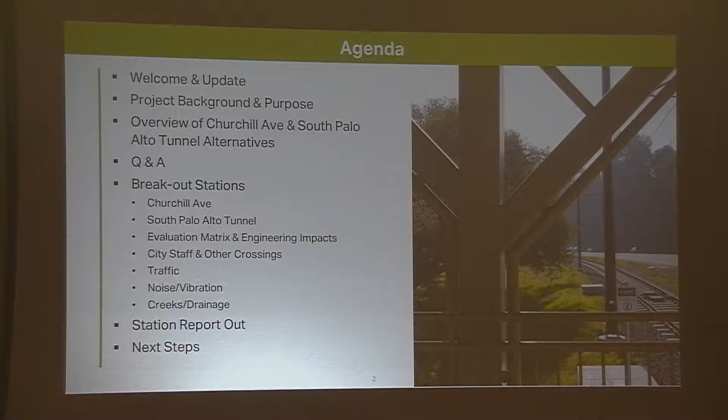So the reason for that is because not only do we have a lot of new information, we brought back all the old information. And we want to make sure that anybody who is coming here new, or had only seen one or maybe not all of the meetings, had an opportunity to meet with and talk to the engineers on all of the various alternatives.

Not only the ones that we've talked about, but we actually have a station talking about the ones that are no longer in play. And so if you have an interest in something that is no longer being considered, we actually have a station for that as well.

We have a station for traffic and noise and people who work on hydraulics. And you're going to see some matrices in this PowerPoint. We've got a station to talk about that.

And we brought all of our previous videos from the other community meetings, as well as the ones that you'll see tonight, are also down front, so that we'll only have time to play them once during the PowerPoint, but each one of them is available here too. So they'll be on constant loop, so you can get a chance to look at those during our workshop station open house portion of the meeting.

Then at about 8:20, I'll reconvene everyone who chooses to stay. You do not need to stay if you've had your questions answered and felt like you saw enough and you want to go home and watch the Raiders.

But for those who do stay, what we'll do is we'll reconvene everyone, and then I'll have the station leads at each of the stations give a report out of the kinds of topics and issues and concerns and questions that they answered, so everybody has a chance to see how their input related to maybe some of your neighbors or others that talk to that station.

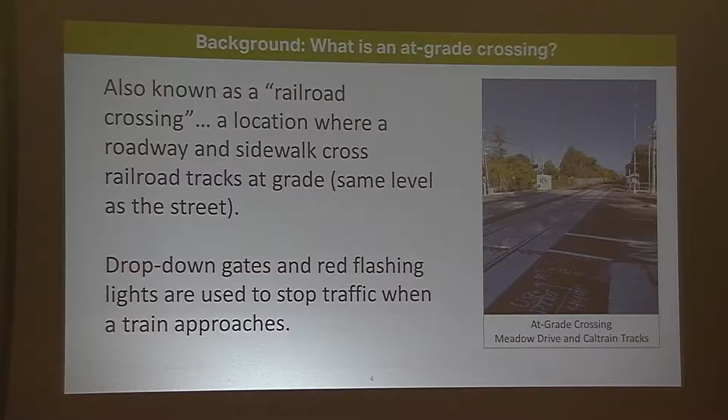But we don't have one for grade separation, do we? Okay, so grade separation is the alternative, where you've actually constructed either the rail above the street or the street above the rail in a way that allows both to pass without the use of gates. So that's just, again, for the purpose of vocabulary.

Just to give a bit of backdrop here, we have been at this for a while, and for some of you, I know, for years, several years. Most recently, with the selection and involvement of the CAP, the Community Advisory Panel, and now the expanded Community Advisory Panel, really over the course of the last year and a half, we've been in earnest looking very closely at Churchill, Meadow, Charleston, and what some of the options are there.

Our time frame, based on the most recent discussion at the City Council, is to be back to the City Council for a decision in the time frame of April and May. The XCAP itself has the assignment and the request from the Council to develop a recommendation within that time frame. Our goal is to get community feedback between now and then, and I'll describe that in a little more detail with the timeline.

This meeting tonight is the beginning of this next phase of what we're calling a bit of a roadshow, where we'll be presenting some of the same information, but really, as Eileen pointed out, for the first time trying to include all of the information on each one of the crossings. To date it's really been very specific about a tunnel, about a trench, about what have been called hybrids, but now we're putting them all together so folks have all of the information, to the extent that we could, in a very digestible form, so that we can talk about all of the options at once.

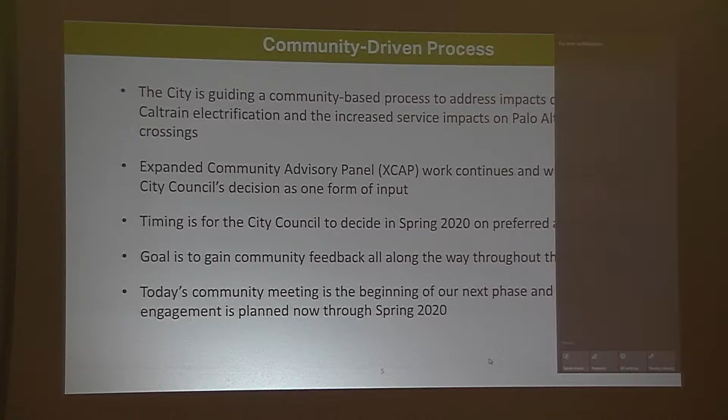Okay, so just in terms of the phase that we're at, I think we've been starting to talk about the work that's come to date as understanding the options. We started with 40 some odd options, and now we're down to, I think it's been described as 7. That effort has really been over this past year and plus, and has involved the engineering analysis, discussions among neighbors, getting some input, and really working on the terminology to try to ensure that the information put together is understandable, using consistent terms so folks can understand what those options are.

We're now really entering into what we're starting to call this community conversations phase, where we want to roll up the information that's been developed for each one of the options and start to get more comprehensive feedback from community members on each one of those options. That will ultimately lead to a decision, whether it's a recommendation that comes from the XCAP, or ultimately a decision by the City Council on what a preferred alternative approach is for each one of the crossings.

Now, in fact, I have mentioned the City Council several times in the last couple of minutes, and I neglected to point them out. I'm going to limit my acknowledgement to the current council, because if I pointed out the former council members here, they'd be half the room. So current council includes Alison Cormack, who's here.

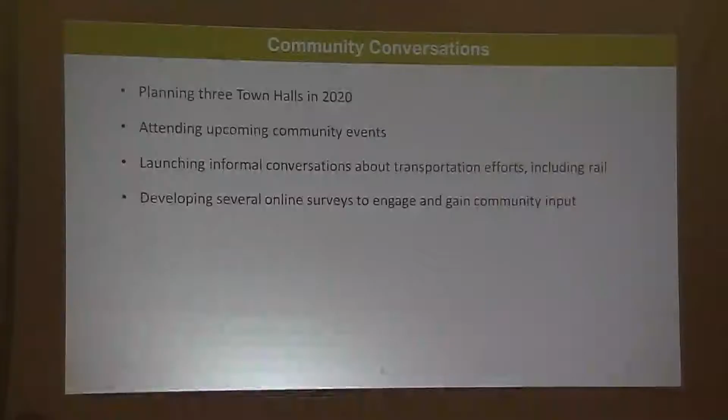We've already covered this, so let's keep going. Whoa, now this - that's a lot of information, I didn't realize it was going to be that busy. But just for orientation, on the left we've got August 2019 through 2020, January right in the middle, and up to May over on the right.

So we've got a series of meetings we'll be having, as well as potentially polling. What's in red is 11/7, tonight's community meeting. In February we expect another town hall, and in March and April additional town hall meetings, where we'll take your feedback from tonight on remaining questions, get additional information, and roll those into the town halls after the beginning of the year. The rest are other methods of maintaining communication, as well as the XCAP meetings, which tend to be pretty technical, as Eileen pointed out.

We will be posting this information, so sorry to those who already took photos, but that way we can make sure we're keeping the same information here as well as online.

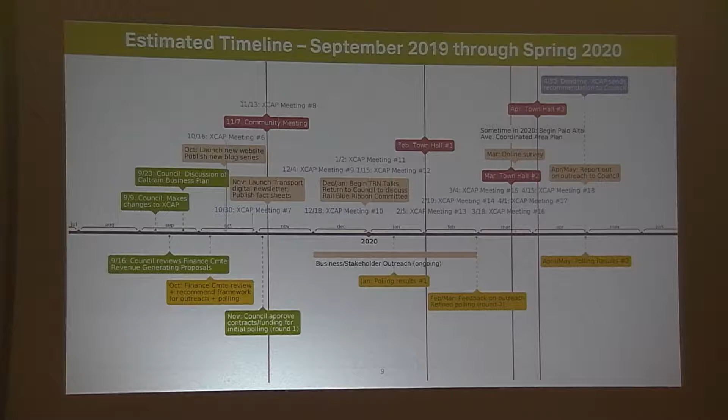At this point, nothing is set in concrete. There's still analysis, options, and variations, and there could be information that causes us to want to revisit the decision on preferred alternatives.

That's a part of the environmental review process. And we'll just follow along.

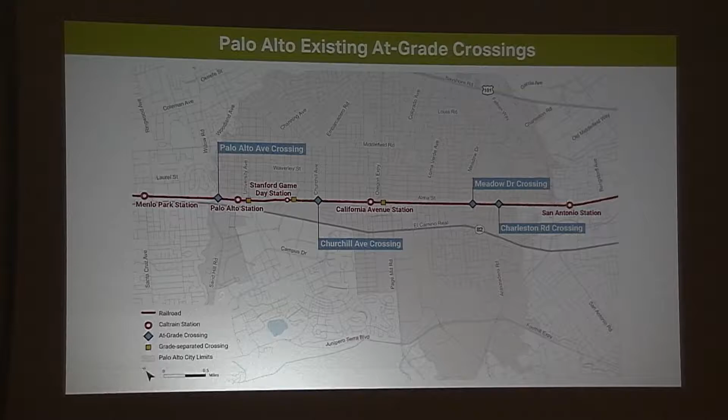Let me go back here before I start this video. As Ed mentioned, this is an at-grade crossing, and he described what an at-grade crossing is.

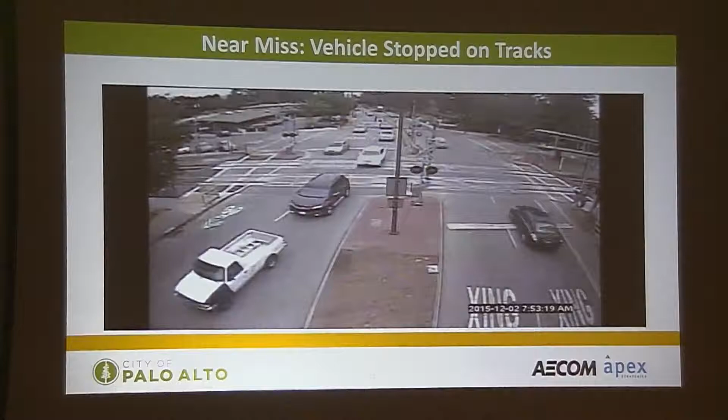I want to go into why we're looking at this project, because we have some major safety concerns. This is up in your sister city, Menlo Park, and this shows people behaving badly at at-grade crossings. The light turns red on El Camino, cars start to back up, and this white car gets stuck on the tracks. If a train were to come by right now, the gates would go down and this car could be trapped, potentially causing a serious accident. This is just one example of people behaving badly. I know in your community you've probably seen other examples at these at-grade crossings.

So why are we undertaking this effort? First off, we really want to increase public safety for vehicles, bicycles, and pedestrians. When we eliminate that conflict between pedestrians, bicyclists, and motor vehicles with the railroad, we increase safety and enhance traffic mobility and circulation.

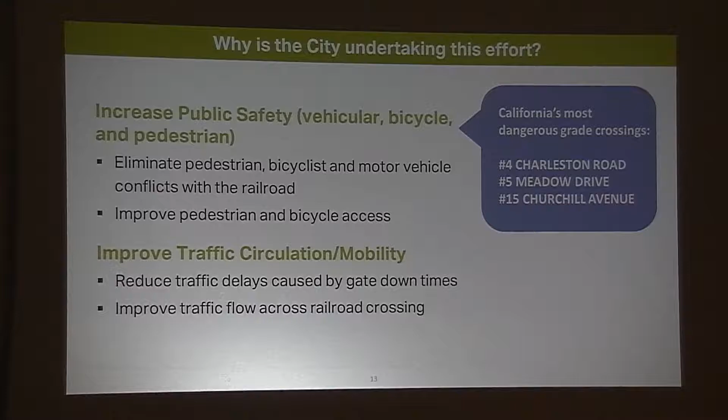I want to point out that among the most dangerous grade crossings in California, Charleston is ranked number 4 by the Federal Railroad Administration, Meadow Drive is ranked number 5, and Churchill Avenue is number 15. So you have some pretty dangerous crossings in the eyes of the Federal Railroad Administration.

Our traffic consultant, Gary, who will be talking here a little longer, ran some analysis on the delays, particularly looking at Churchill. This picture shows the railroad tracks, this is Alma, and this is Churchill. I'm not a traffic engineer, so I'm just going to try and summarize this, and Gary will be available to answer more.

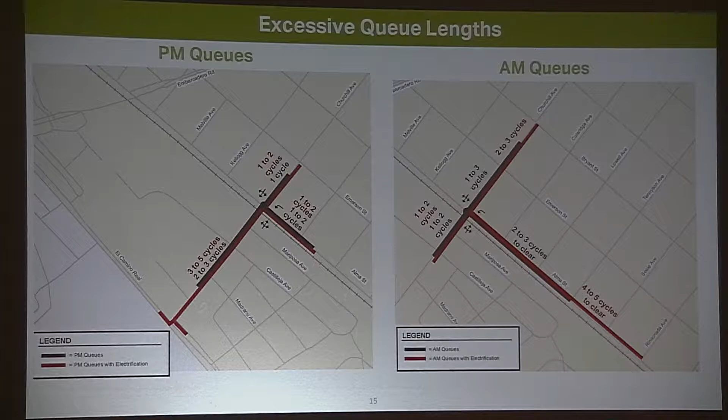And in the AM, with these excessive queues, right now you're probably waiting 2 to 3 light cycles before you can get through the intersection. With increased train traffic, you'll be waiting somewhere on the order of 4 to 5 cycles. So it's going to take you much, much longer to get through these intersections because of the increased train traffic.

So that's why we're looking at these projects, is we're looking at how to avoid that conflict. We've already looked at some of the alternatives, Meadow, Charleston, and those are over there that we'll look at. But tonight we're going to focus on a couple alternatives that we haven't presented before.

This is going to be the South Palo Alto Tunnel, and these are basically the same alternative, but with a slight variation. The first one is we're going to be running the passenger and freight in the same tunnel. The variation on that, which we were requested by council to look at, is to have just passenger rail in the tunnel and leave the freight on the surface.

And then I'll go on and talk a little bit about Churchill, and I'll come back to that. So let me start looking at the South Palo Alto Tunnel. This South Palo Alto Tunnel basically starts at the north portal for the South Palo Alto Tunnel.

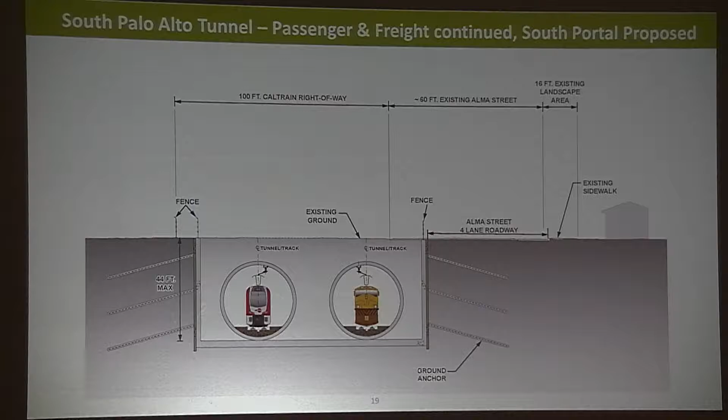This is the north portal. To go to the south portal, we have a similar situation: we're going to have the twin bore tunnels here on the left-hand side, and the shoofly, which is the detour while we're constructing the tunnels. Here we have less right-of-way, so Alma gets necked down to 1 lane during construction, or a one-way road. Then in between the portals, within the twin bores themselves, the surface streets are pretty much as they are today, a 4-lane Alma Street.

So we have a video here. This is a 3D animation, an aerial view of Palo Alto. The lime green is the Caltrain tracks. The red is the temporary or detour tracks. One of the first things we have to do is some major relocations. Then, shown in purple, we can start constructing the tunnel approach tracks and the tunnel portals, and once those are done, we can start our boring machines and bore the tracks in the tunnel. So we're going to start at the north end, fly in here, and just walk through what the project looks like from north to south.

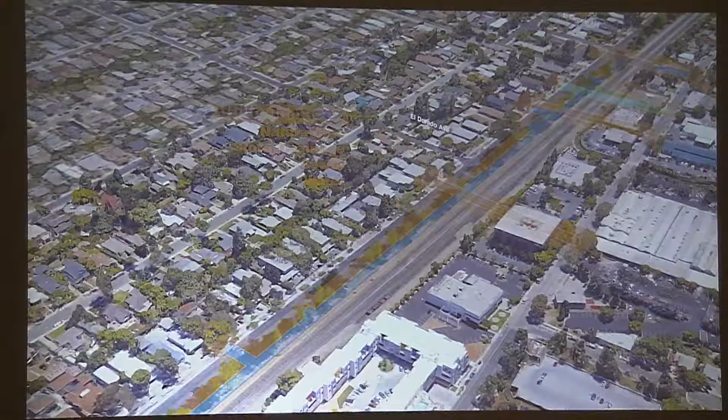As I mentioned, we're going to have major utility relocations because we're going to be doing a large trench, which you'll see shortly. One of the first things we have to do is remove the vegetation. Then we can install the temporary fence. This is all getting ready so we can build that temporary detour.

We're going to be altering Alma by shifting it to the east, and then Alma will be necked down to 1 lane in each direction. We can build the shooflies, these are the temporary tracks. This allows us to move Caltrain, which is an operating commuter rail, onto these temporary tracks. Once Caltrain is on the temporary tracks, then we can start the major construction.

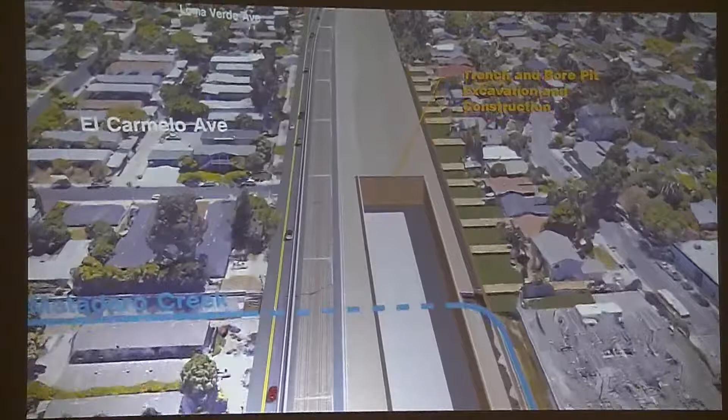First off, we'd be looking at building the trench, which means we have to remove surface obstructions that are in the way of the trench construction. As we start the trench construction, we're going down deep enough, but we hit Matadero Creek. This is a huge engineering challenge in the fact that Matadero Creek has quite high flows, and from an engineering point you either can maybe solve it with a siphon or a lift, but it also has huge environmental impacts as well because it is a creek.

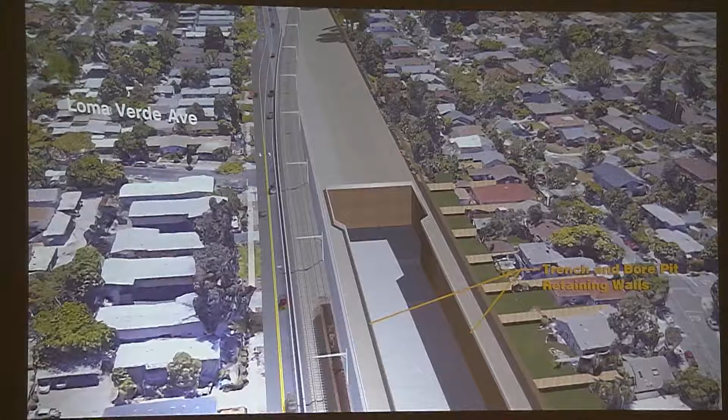Once we get down deep enough, then we can actually start our boring machines. These are large boring machines, and with some of the geotechnical constraints, what we're showing here is that there's about a 15-foot separation between the twin bores, which makes our portal about 100 feet wide and 44 feet deep. This is why we have necked down to 2 lanes in each direction on Alma, with the shoofly to the left of it.

Once we have our portals done, then we can start our boring below surface, and everything above surface remains untouched. We're deep enough in the bores that we can go below Barron Creek, so Barron Creek is not impacted, and we stay deep until we start to come up, and we'll come up to a portal just after Charleston.

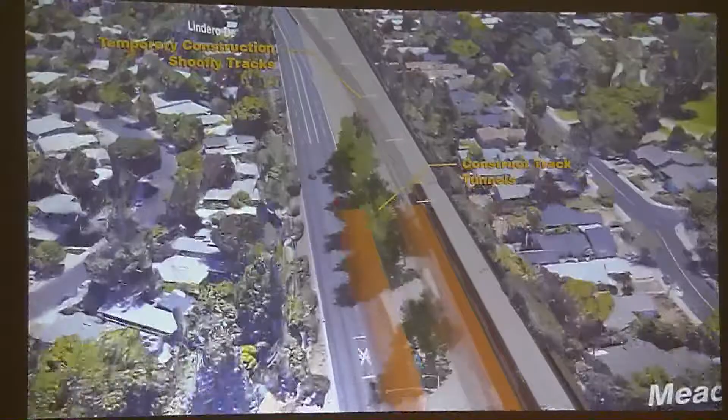So as we get towards the southern portal, again, we have to build a temporary shoofly. We have to neck down Alma. As I mentioned before, Alma is going to be only 1 lane because of the constrictions of the portal.

And then you can see Adobe Creek up there in the top of the screen. This is about where we have to start our portal. Again, we do the same process where we have to build the shoofly. We reduce Alma to 1 lane, and that allows us to be able to do the trench construction.

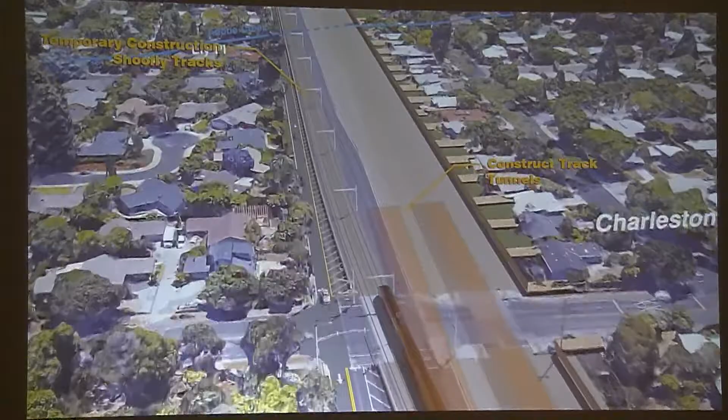As you see here, some of the backyards here are going to be impacted because that trench is actually quite deep. In order to do some of the structural support, we have to do something called a tieback, which has a subsurface easement into those backyards, and also restricts probably what they can plant in their backyards. So we're going to head back.

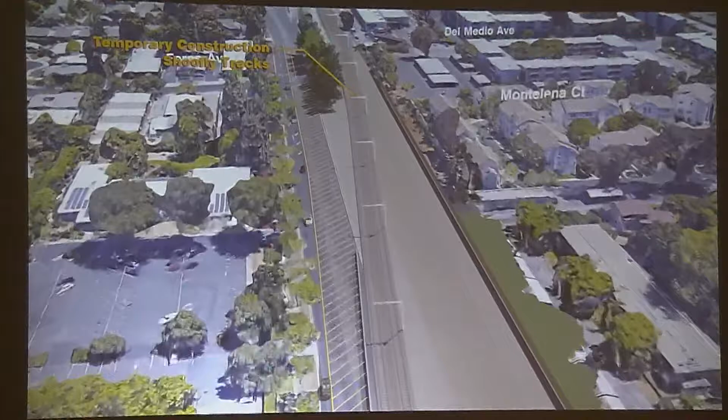So this is just showing the construction of the shoofly as well as the construction of a reduced Alma.

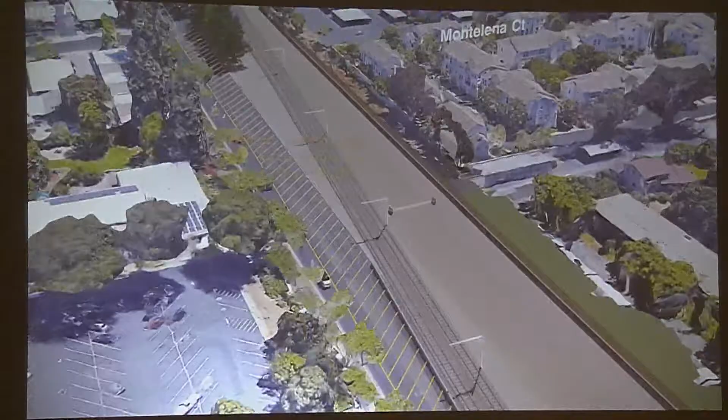So now we're going to turn back around and show the trench construction to the south portal, where again we go back, we do a trench. Here we have the Adobe Creek. Again, we are going to have major engineering challenges on designing something because these are quite high flow creeks, and there's also the environmental issues of dealing with the creek.

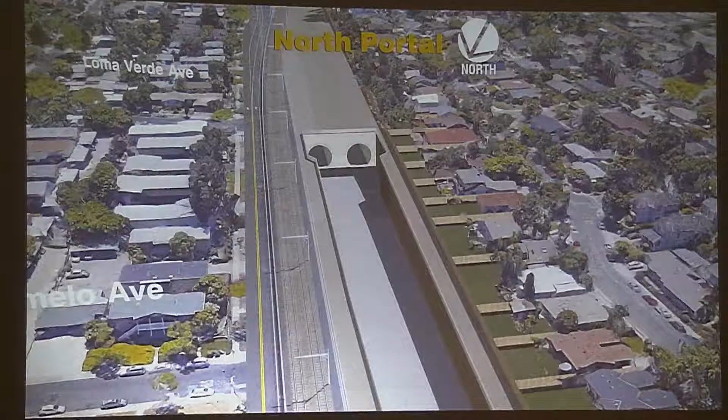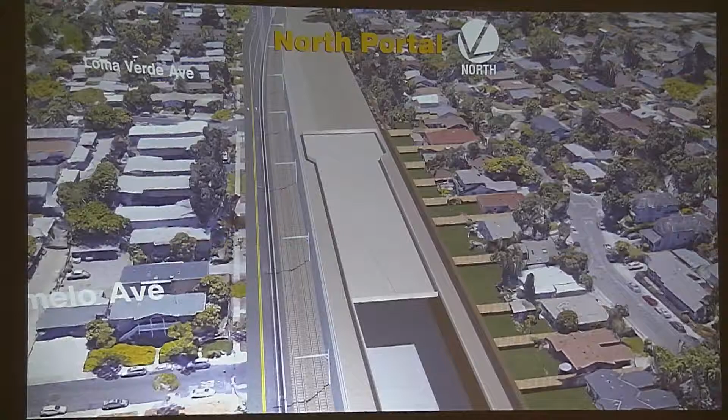Once we have built the portal, then we can construct a roof partially, up to where we can, over there. And then we can also construct a partial roof over the trench in the north portal as well. To finish off, you could then go through and do some type of planting or finishing of the structure. But because of the tunnel and stuff, we may be limited in what kind of vegetation you can install above that. This is just kind of a view of the finished look of a north tunnel.

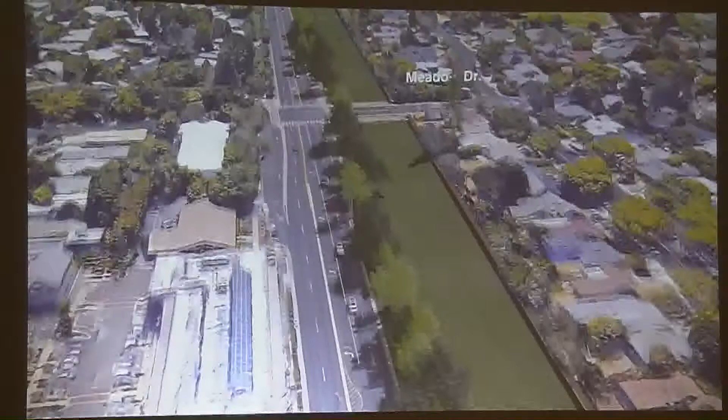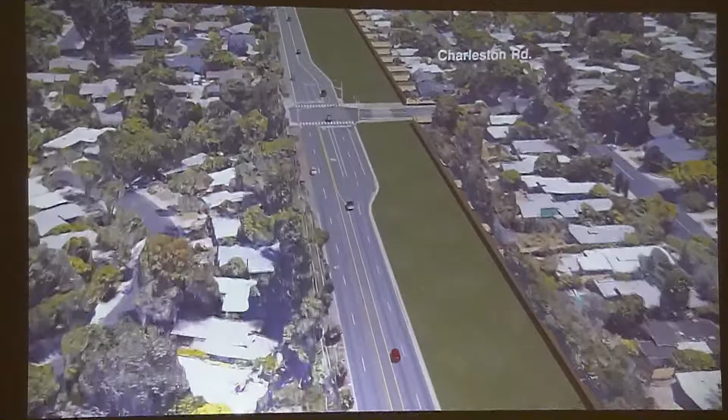And in this case, the freight and the passenger rail are going to be running in the same twin bore tunnels. And then once that's done, then you can restore Alma back to its configuration of 4 lanes or 2 lanes, as the case may be.

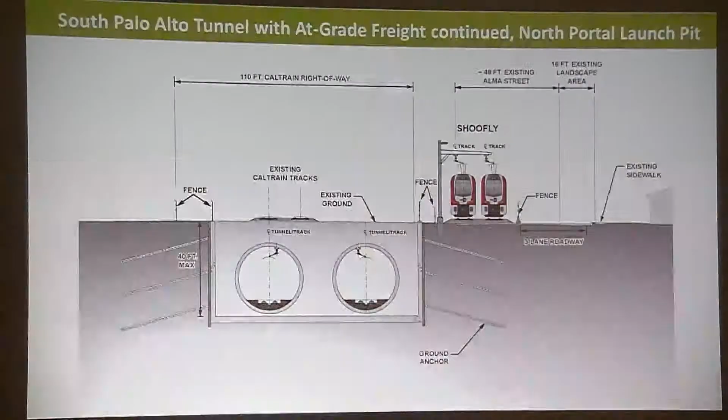And then, did I just go forward? Oh, I went the wrong way, sorry. And this is a video. Did I go backwards? Hold on. Sorry, I went the wrong way.

And this is the South Palo Alto. In the final configuration, you'd have passenger rail running in the twin bores, and you would have freight running on the surface level. We did check with Caltrain, and currently the freight railroad has the right to run on both tracks, so that's why we're showing both tracks in this location.

So if you were to get them down to one track, you would have to do some kind of agreement and probably acquire those operating rights from the freight railroad.

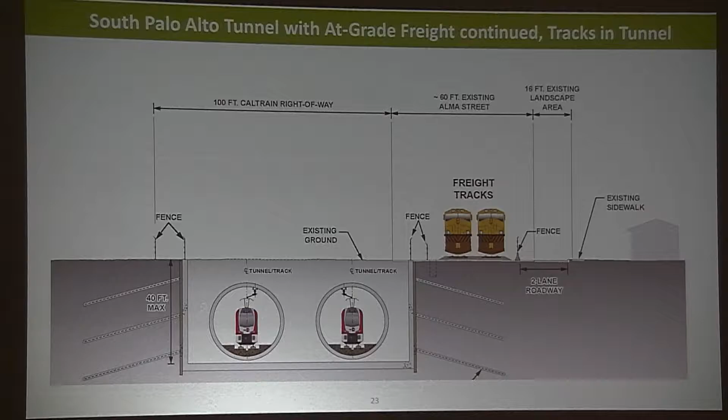We still will have major utility relocations because of that trench through there. Then we can build the approach tracks. And once we build the approach tracks and the north and south portals, then we can start the tunneling machine and build our tracks in the tunnel.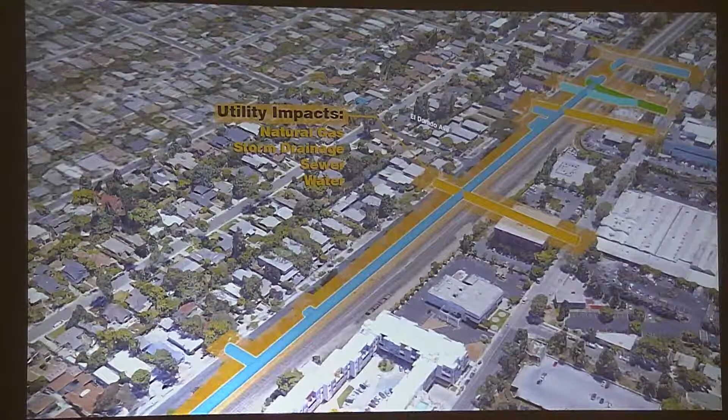Again, we're going to fly it to the north and start looking at this project from the north to the south. Start with utility relocations that include all the major utilities through there that have to be relocated.

We'll start with removing vegetation so that we're clearing the way for installing a temporary shoofly. That includes installing temporary barricades or fencing, reconfiguring Alma Street, shifting it, as well as putting in one lane southbound and one lane northbound.

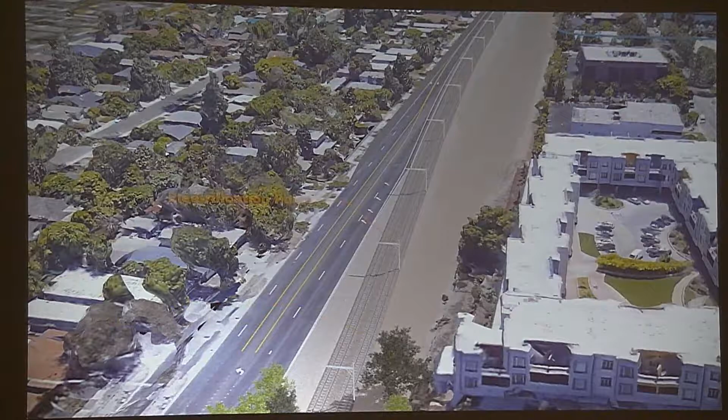Then we can build the shoofly, move Caltrain to the temporary tracks. And once we've placed Caltrain on the temporary shoofly tracks, that allows us to clear our construction area so that we can begin construction of the trench and the tunnels themselves.

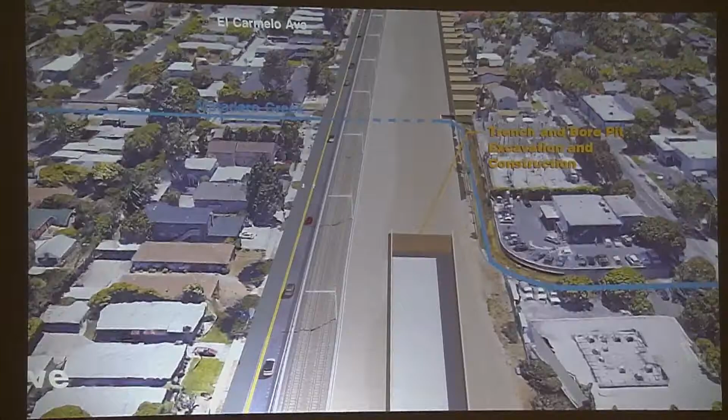This will involve removing some of the surface level obstructions, and then we can start the trench. Again, we hit Matadero Creek. This is going to be an engineering challenge, how to divert a creek from not only an engineering but also an environmental standpoint.

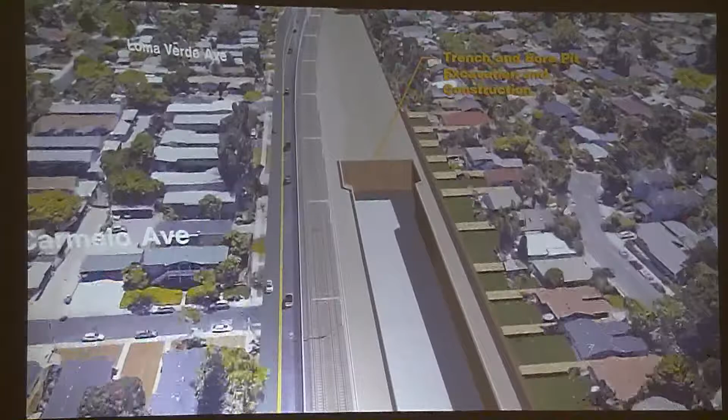And we also have subsurface impacts to the yards with the tiebacks required for the tall walls.

Now, since we were able to reduce the size of the tunnels, we're able to reduce the size of the portal here. In the previous one, we were at about 100 feet. Here, we're at 90 feet and 40 feet, so we've reduced it by about 10 feet.

We've been asked by some other folks, can you get these tighter together if we did some ground improvements? We did take a look at that. If we did ground improvements to bring these tunnels in to have a 2-foot separation, we'd only pick up about 10 feet, so we'd still have a restriction on Alma.

So as we move down, the tunnels are going to be below Barron Creek, and we continue. Again, this construction and the tunnels can be done without impacts to the surface facilities.

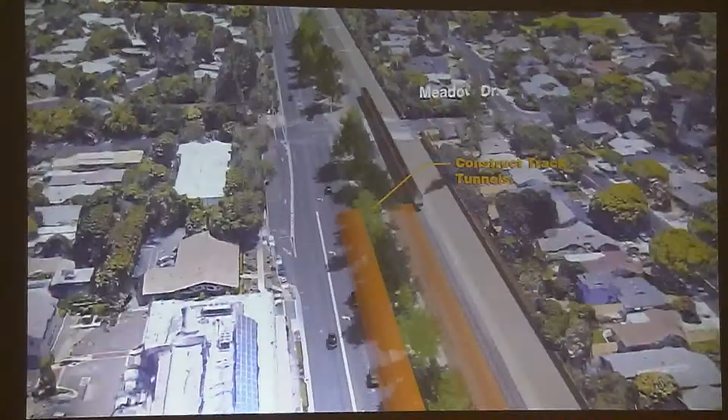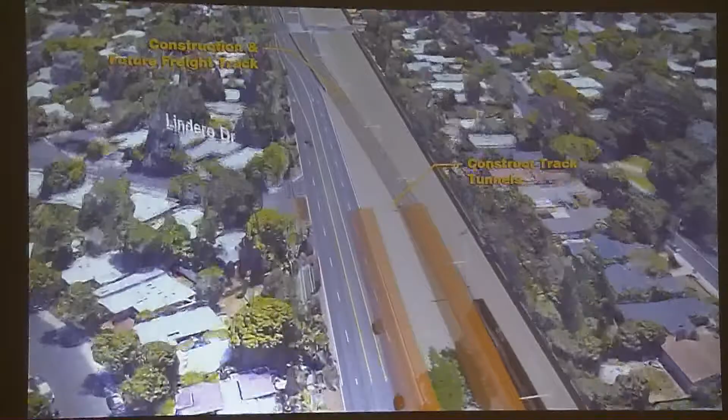And then as we start coming back to our portal for the south, again, we have to look at constructing a shoofly around that portal. Alma does get necked down during construction in this location.

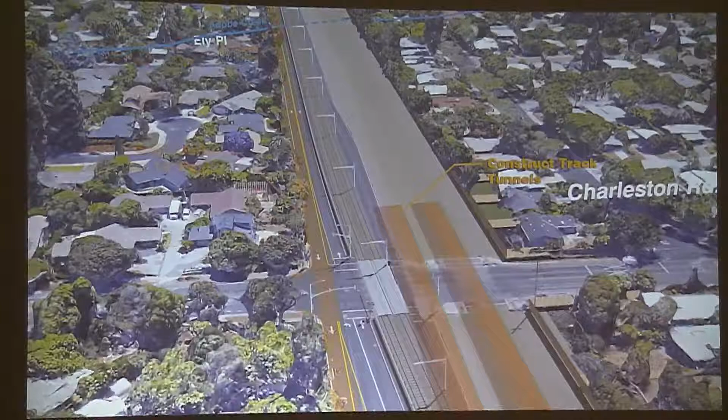And again, as we're building these shooflies, we have to do the reconfiguration of Alma Street, but here we don't have Alma as one way, we have Alma with one lane in each direction.

And to be noted that these at-grade crossings will remain after the fact because this will be the permanent freight alignment for the freight, with the passenger being in the tunnels.

Then once we have the shoofly done, we can construct the trench. Again, at Adobe Creek, this trench would actually block Adobe, and we have the extreme challenge of how to divert a creek, from both an engineering standpoint and an environmental standpoint.

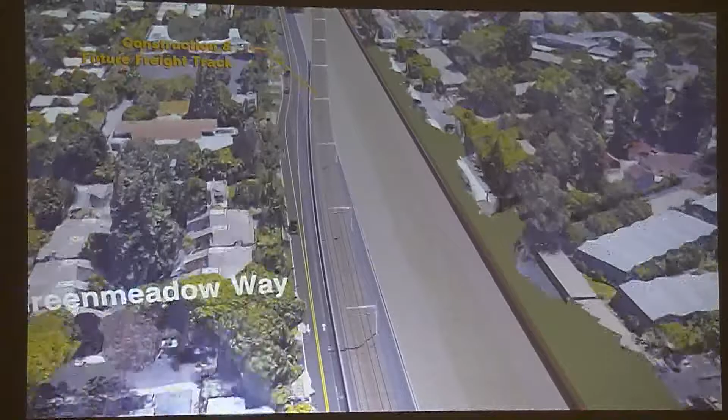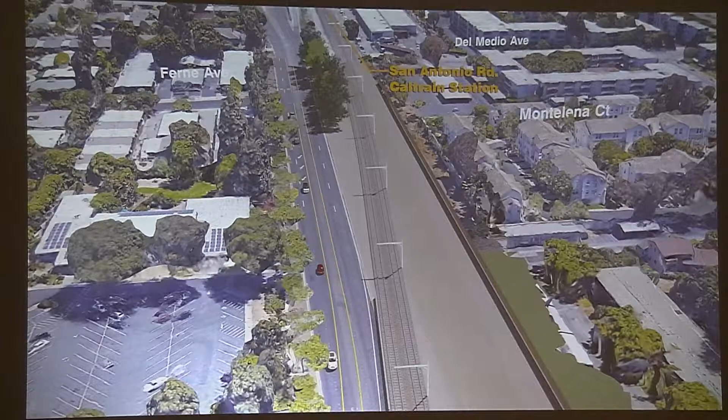The northernmost end is the San Antonio Caltrain platform. Turning around, this shows the trench construction at the south end as we bring it back to the portal, somehow working an engineering feat with Adobe Creek. The portal here is again the same as the northern portal, about 90 feet by 40 feet.

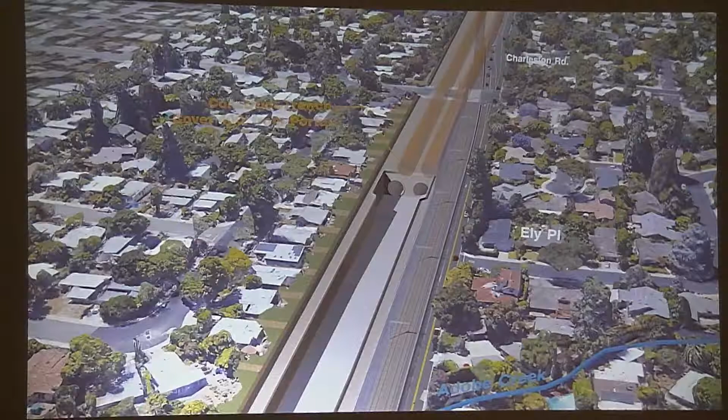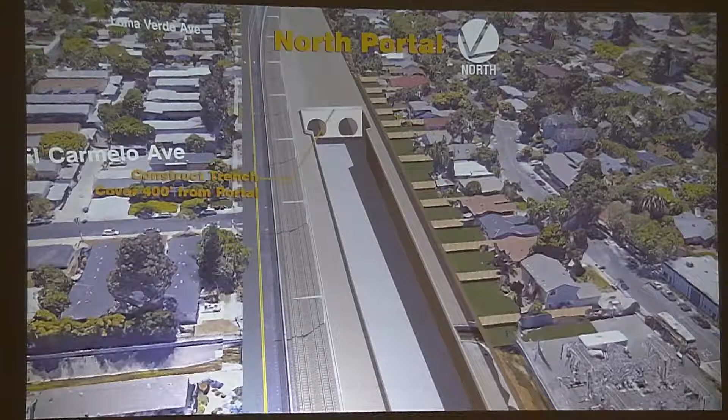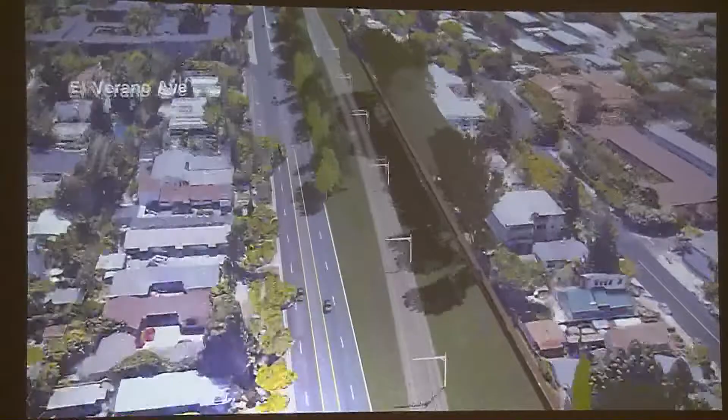You can come back and construct a partial roof at the north end as well as the south end. Then the final configuration is the passenger rail runs in the tunnels, and the freight remains at grade and runs during non-revenue hours for Caltrain, meaning it would continue to run at night. Because you have at-grade crossings, these freight trains will have to blow their horn per FRA regulations, so that will also remain in this scenario.

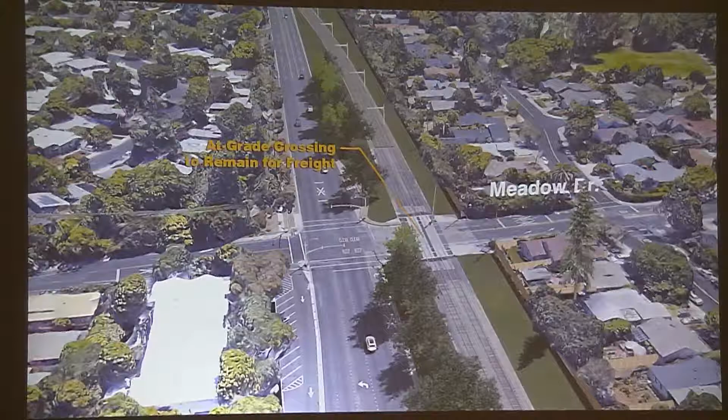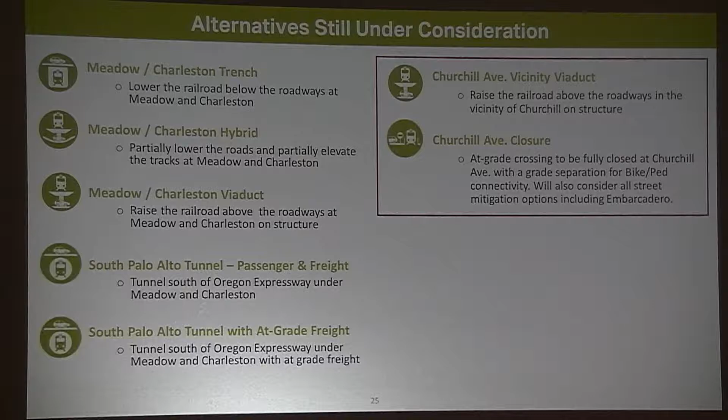But first, let me talk about the viaduct. So in the viaduct, as you start from the at-grade, you're going to have a portion of the viaduct before you go to bridge. It's going to be on retained earth with retaining walls. And we still also have to have a shoofly on this one.

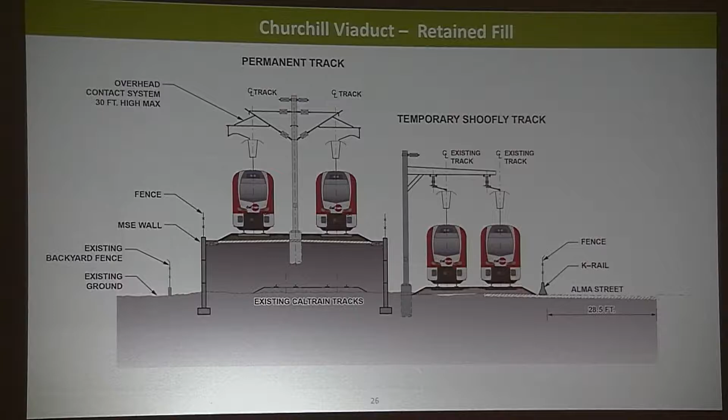Looking north, the ultimate Caltrain alignment would be on embankment and on structure, and there's a temporary shoofly built towards Alma, where we're able to have Alma at 28 feet. As you move up and start to go higher, you'll go from embankment to actual structure. This is just an example structure.

This is not... there are multiple types of structure that could be used for a viaduct. So I'm going to run through a 3D animation for this as well.

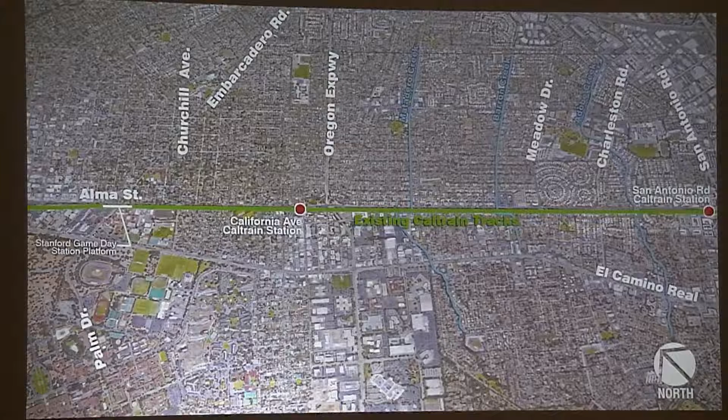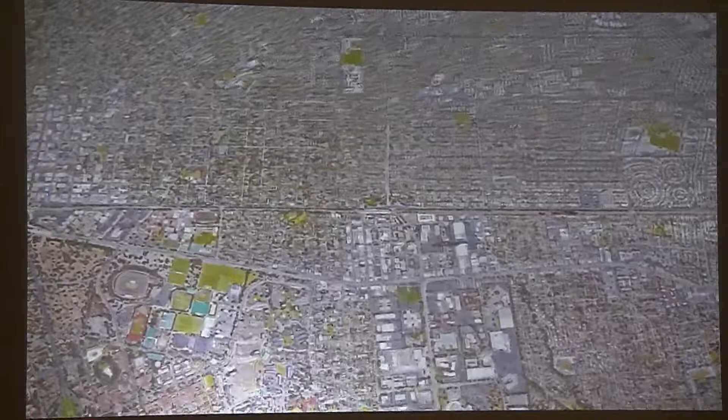So we're starting again at the north end. We need to remove some vegetation. There's some minor utility work because we're really leaving everything at the surface and constructing up. We need to put in a barricade prior to constructing the shoofly.

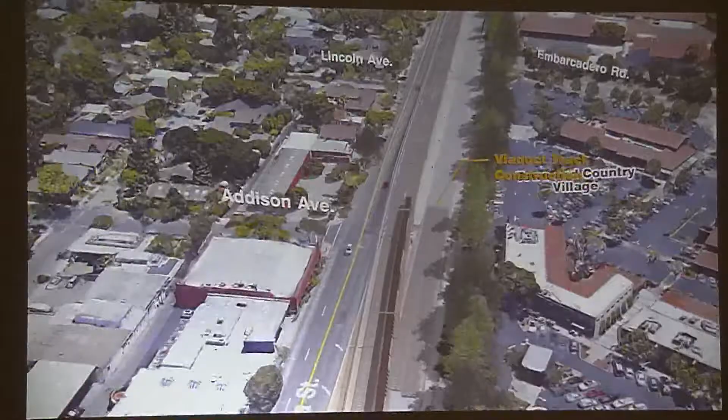Alma necks down to one lane in each direction, and once we have the shoofly, we move Caltrain operations to these temporary tracks, which allows us to start construction of the viaduct.

As we start up, this is the portion that's going to be on embankment, but because we're raising the tracks, we'll also be eliminating the Stanford Game Day station. We also need to do some fortification or strengthening of the Embarcadero bridge because trains are much heavier than cars, and the shoofly would be on that existing bridge.

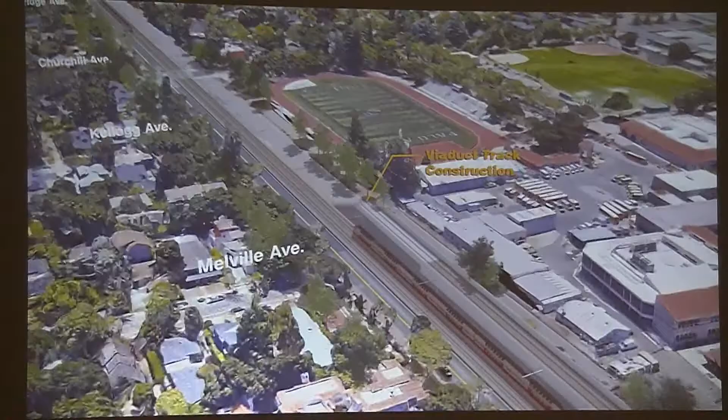Right about Town and Country is where we'd start going into aerial structure, with some kind of breezeway underneath, high enough that you're on bridge structure. Churchill can remain open during this construction, but we do have some lane changes during construction. Churchill does remain open during this construction.

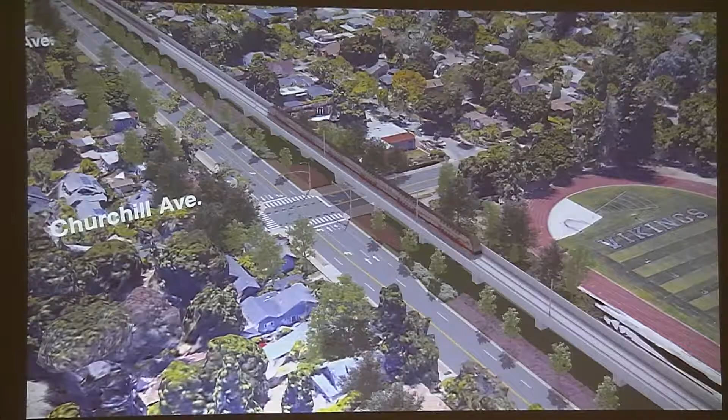It's going faster than I can... Once the viaduct is constructed, trains would then move back up to the viaduct. We remove the shoofly, and you could then replant some kind of vegetation.

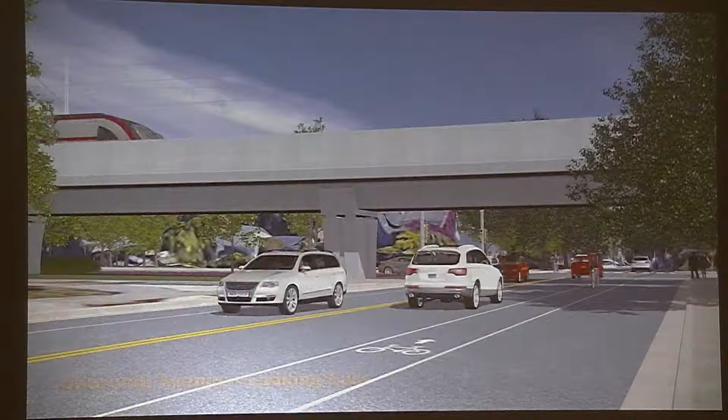This is just a view looking east, and that was a view looking west. This is a view looking east at the viaduct, looking towards Alma.

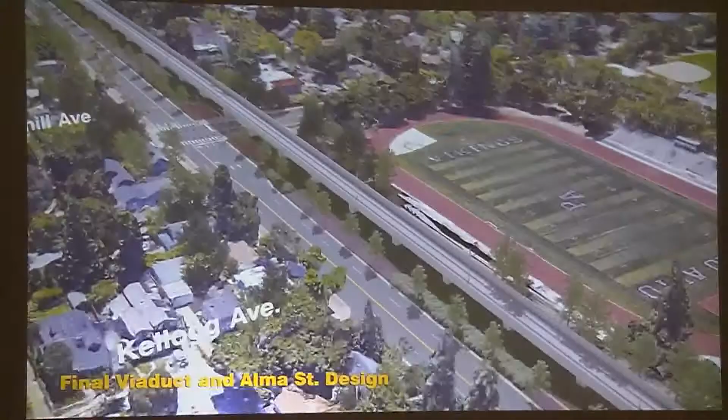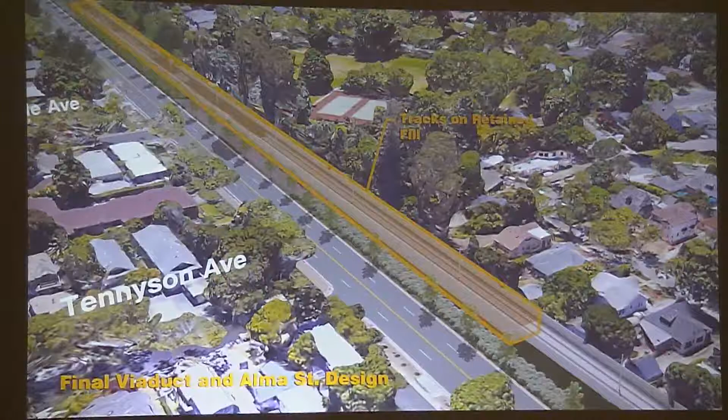We honed in, as we were asked, to get a total view of the viaduct. This is moving along where we're on embankment until about Town and Country, we're on structure past the high school, past Churchill, and then right about Lowell we go back down to embankment, and then we conform, or meet back at existing grade just around Santa Rita Avenue.

I just want to point out that between these two alternatives, the amount of construction time is about the same, and the magnitude of cost is about the same. But the cost for the passenger and freight, when they're running together, is slightly more because we will actually demolish the shoo-fly, whereas in the other option you would leave that railroad track in place as a permanent track.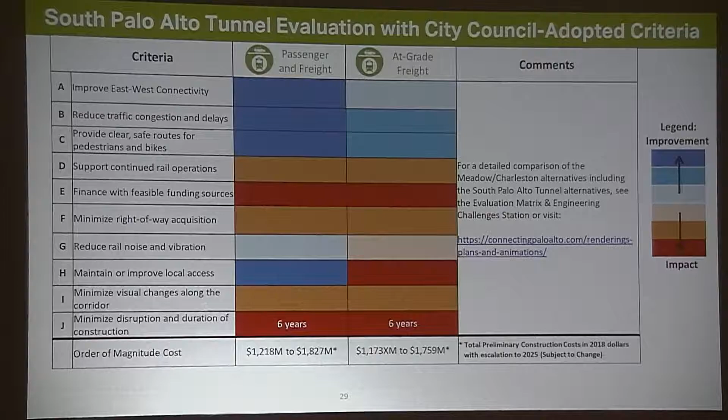So these were the criteria that we're comparing the two alternatives against each other, which is the City Council criteria.

But we also wanted to look at the engineering challenges. Some of the biggest engineering challenges for South Palo Alto are the creeks and the impacts to the creek, and we have a couple of hydraulic and drainage engineers here if you have questions on that. We have challenges with how you even manage to divert that large a flow—you could have increased risk due to flooding. You also have long-term maintenance concerns, not only because of the creeks, but also because the tunnel is below groundwater. I believe groundwater in Palo Alto is about 13 feet below surface, so we'd be having to deal with that.

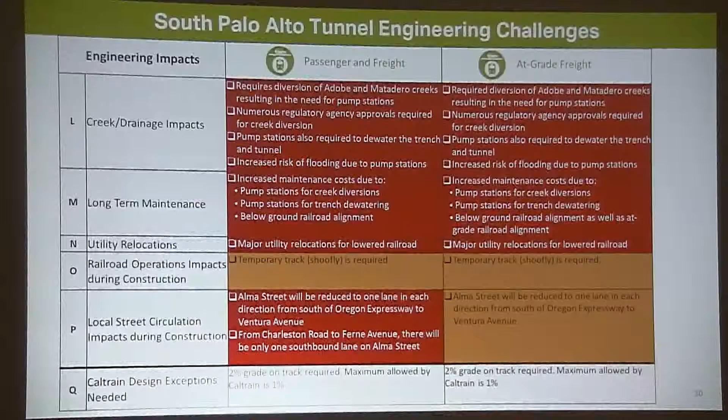There are also major utility relocations, and the circulation at Alma will be an issue during construction and in the final configuration for one of these. And the last thing is both of these alternatives require a design exception from Caltrain.

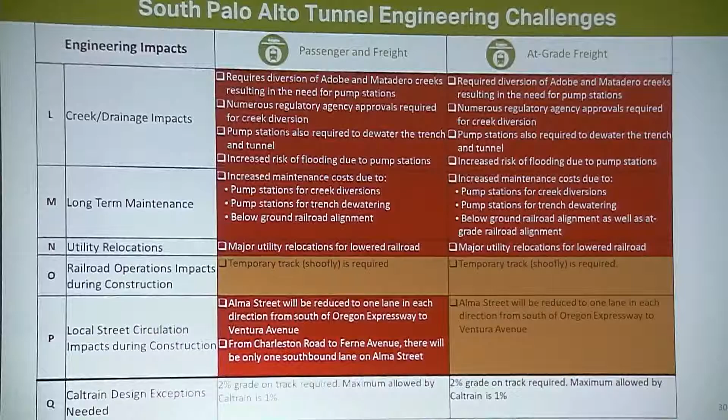Caltrain criteria calls for the railroad to be at a 1% grade, but the 1% grade will not work at all. So both these alternatives are looking at a 2% grade, which is not a guarantee that Caltrain would grant us a variance for that design criteria.

So I'm going to quickly jump into the Churchill Closure. When we're looking at the Churchill Closure, we're actually looking at an alternative that builds in a bike-ped undercrossing of some sort. We've developed two options so far. In addition to that, which Gary will talk about, are some of the improvements that need to occur in order to make the Churchill Closure work, or the mitigation measures that need to occur.

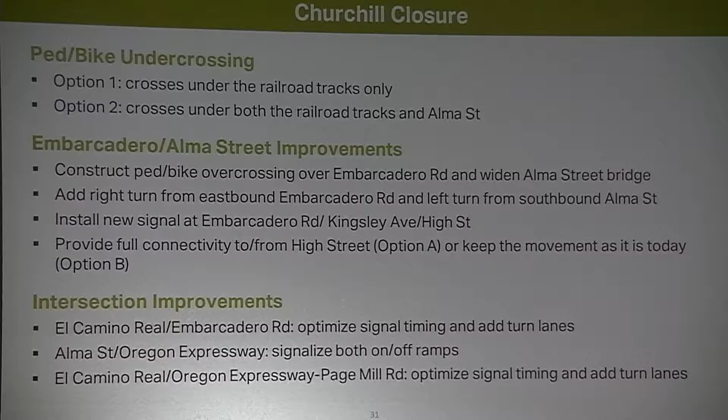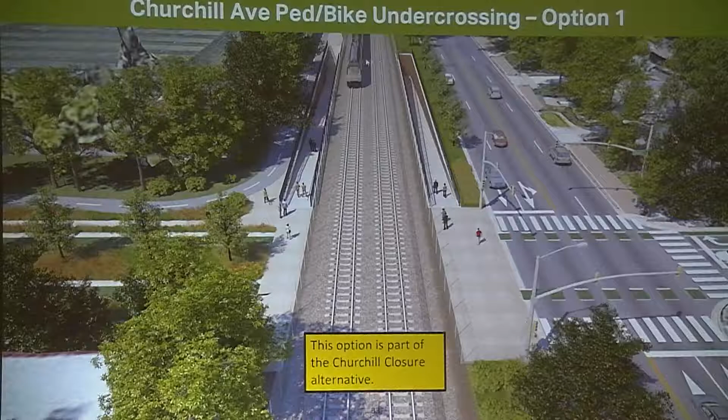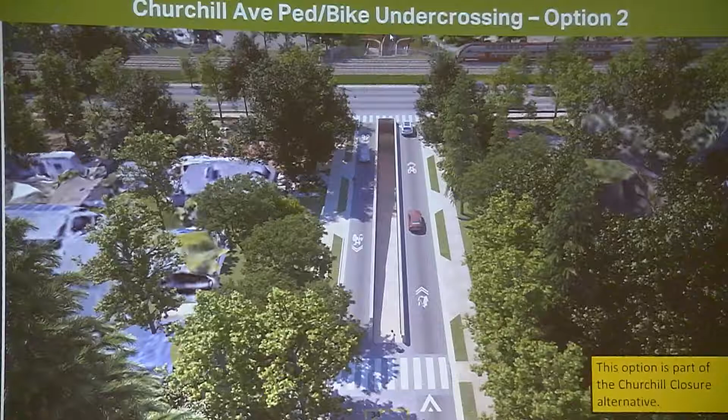And with that, I'm going to turn it over to Gary to talk about some of the...

Okay, yeah, this works.

My name's Gary Black with Hexagon Transportation Consultants. We're transportation engineering consultants hired by the city to take a look at what happens if Churchill gets closed. We recognize that if Churchill's closed, there's traffic that's using Churchill today that would be rerouted to other streets. So we were asked to determine whether the traffic that was rerouted would create any impacts.

If it would create impacts, what improvements would we need to accommodate that traffic? The amount of traffic using the Churchill crossing now is about 400 cars in the peak direction per hour. In the morning, it's about 400 cars going towards the high school. In the afternoon, it's about 400 cars in one hour going the other way. So that's the amount of traffic that needs to go somewhere else if Churchill gets closed.

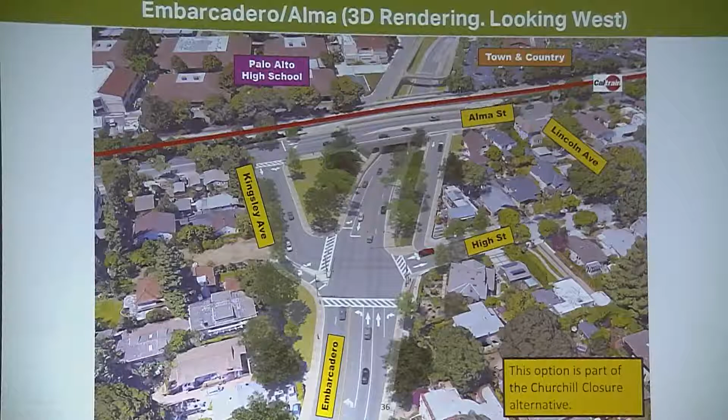We determined that the traffic would either be rerouted to Oregon Expressway, Page Mill Road, or Embarcadero, because those are the two crossings on either side of Churchill. So that's where those 400 cars would go. We looked at the locations where that traffic would have an impact, and the most challenging location is at Embarcadero and Alma, which I call the Embarcadero-Alma interchange. There are some connecting ramps there, but it's an incomplete interchange, so some of the movements necessary to go between Alma and Embarcadero and vice versa involve using residential city streets.

We don't want to increase the traffic on those residential streets, so we're looking at options for reconfiguration at this interchange so that traffic doesn't need to use Lincoln, High Street, and Emerson. This diagram here shows one of the options, and as you can see, this is kind of animated, right? Why don't you push the button?

That shows the concept of perhaps a new bike-ped bridge over Embarcadero, so that the signal that's at the crosswalk right now at Town and Country could be removed. And right now, as you know, you turn right from Embarcadero onto Kingsley if you want to make that connection, so that would be maintained.

We would need to increase the capacity of Alma Street northbound with this configuration. So we're showing the bridge slightly widened to get two lanes northbound and two lanes southbound. Right now, there's only one lane northbound there. And then we would have a turn pocket to go from Alma onto Kingsley.

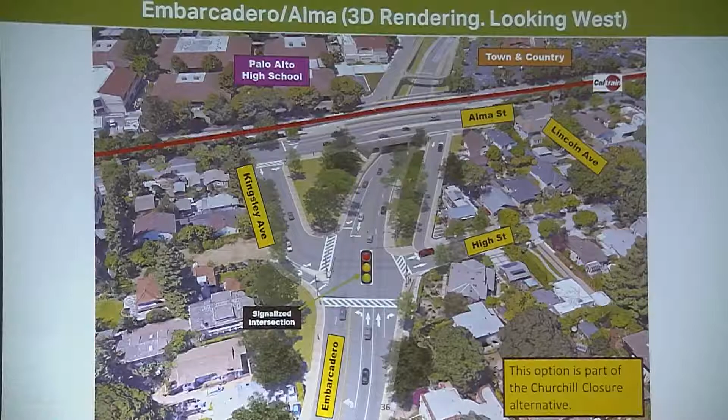So it wouldn't be necessary to go around the block on city streets to make that connection. I should say this is a preliminary conceptual design, so don't think it's going to exactly look like this. There are other options, and a lot more work needs to be done in the design of this. But the concept we want to convey is making improvements at this interchange so that all the movements can be made there and not have to use the residential streets.

There were a couple of other intersections that also would need improvement because of this added traffic if Churchill was closed. One of those intersections is El Camino and Embarcadero, where there would be an added lane. Then, right now at the interchange between Alma and Oregon Expressway, that would need traffic signals. Right now it doesn't have any, so there would be additional delays caused there.

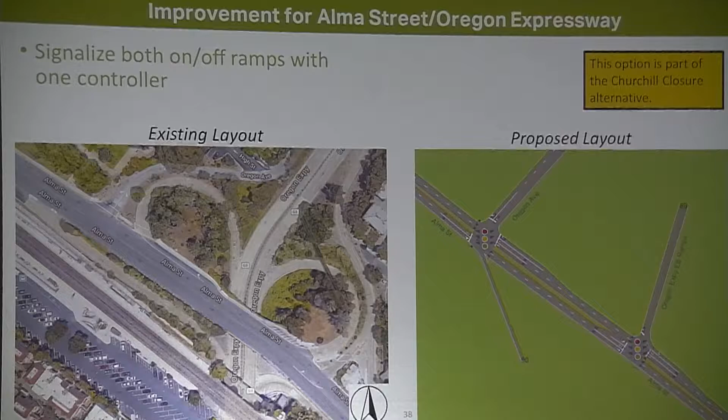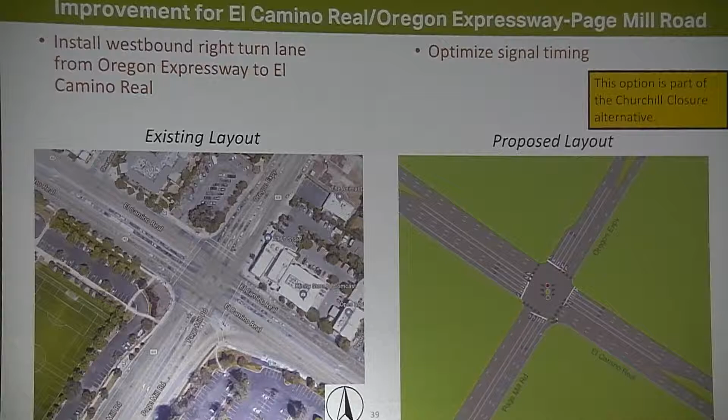So that would need traffic signals. And I think we have one more, at the intersection of El Camino and Page Mill, where there would be added turn lanes, plus some signal modifications.

I know we went through it really fast, so I just wanted to say that the concepts you saw there, we have a traffic table right here towards the back. After we're done, you can come up and I'll meet with you to talk about answering more traffic questions. But with those improvements, we would be able to accommodate those cars that are now using Churchill, instead using Embarcadero, Oregon Expressway, and Page Mill Road.

Then the last two slides are the matrix of evaluation of the Churchill Closure versus the viaduct. We're not going to go over these, but at the evaluation table, if you want to take a closer look at all the criteria, the pros and cons of these two options, you can do that at the evaluation table. Then I'll turn it back to Lynn.

Thank you so much for indulging us and not having 1,000 hands go up. You do have a copy of the matrix with you, not only this new information, but every single one on the same sheet, on both sides. The one side is the council criteria, and the back side is the engineering concerns and challenges that Etty was speaking to.

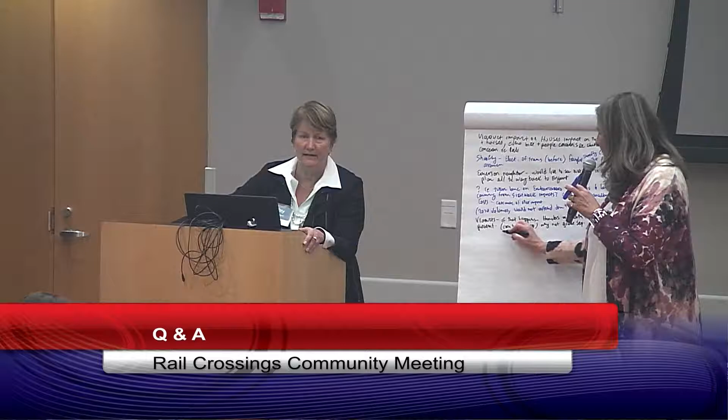What was the other question? Why not no grade separation? Is that still on the table? It is always on the table through the environmental process. So even at this stage, the no-build option will always be carried through into the next phase of work, which is the environmental process.

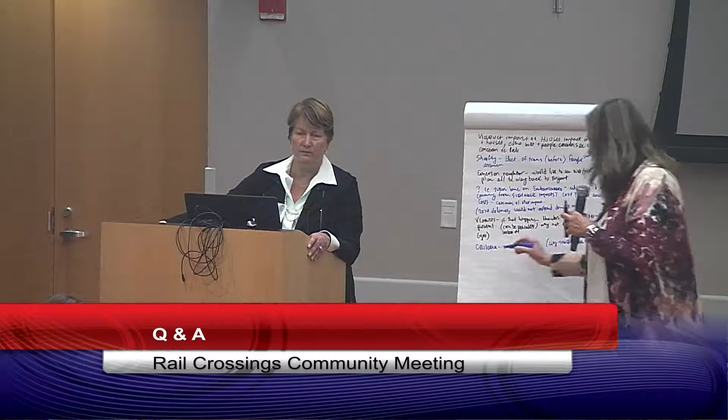Etty, do you want to talk about emergency coordination, how you've been doing that with the city and others? Yes, city staff met with the police and fire departments, and they actually issued letters on this, noting that grade separations can improve response times, because those excessive queues also hold up emergency response. So if you grade separate, you'd actually see an improvement, since you wouldn't be waiting at a stop sign.

But what about during construction? Well, construction would be another factor that would have to be looked at. For Churchill specifically, that was part of the conversation—the closure of Churchill with both police and fire.

Ed, did you want to add anything? Were you in that meeting? I believe you were. As part of the documentation, we're still working on making sure the reports are available. But as Etty pointed out, we've had ongoing discussions with police and fire on all of these options. They confirmed some common sense—especially on the fire issue, since they actually simulated it. They concluded that closure of Churchill really wouldn't affect their response times because of the location of the station and how their response routes are set up.

On the police side, they are constantly roaming on patrol, so it's not an inherent change for day-to-day response. But if Churchill were closed, they would have one less access point to Paly High School, so a route for emergency response to Paly via Churchill would no longer be available. We're talking to them about other ways to mitigate any limitation on access there, but again, it's similar to emergency response in other parts of town.